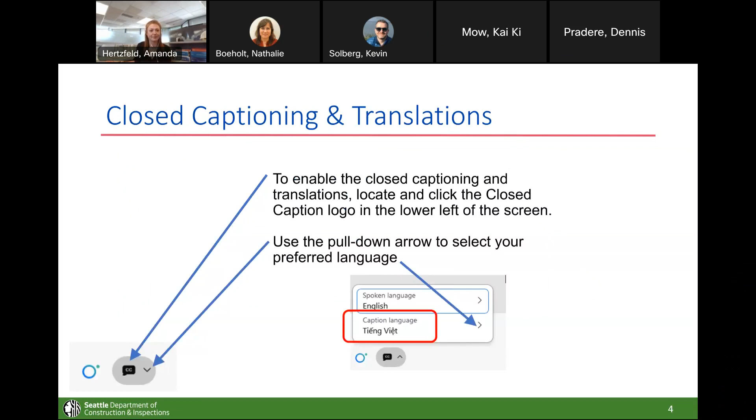So with that, let's go ahead and get going into our meeting. The purpose of today's meeting is to review the draft technical standard for unreinforced masonry retrofits. We'll be providing an opportunity for questions and answers. Some things we'll cover today include the background on URMs in Seattle, why we have this technical standard, where it came from and where we're headed with it. We'll spend most of our meeting reviewing what is in that draft technical standard, and then we'll allow at least a half an hour at the end for questions.

So with that, let's do some introductions. I introduced myself briefly, but my name is Amanda Hertzfeld. I am the URM program manager with SDCI. I was hired on in November, and before that I worked for FEMA, the Federal Emergency Management Agency, doing a lot of earthquake risk reduction activities. So let me toss it over to Kevin.

Hi, can you hear me, Amanda? Yep, great. My name is Kevin Solberg. I'm a structural plans engineer with the city of Seattle, and also have a background doing seismic retrofits in the Seattle area from the consulting side of things. So I'll be discussing the nuts and bolts of the alternate method and the overall technical standard itself. Thanks, Kevin.

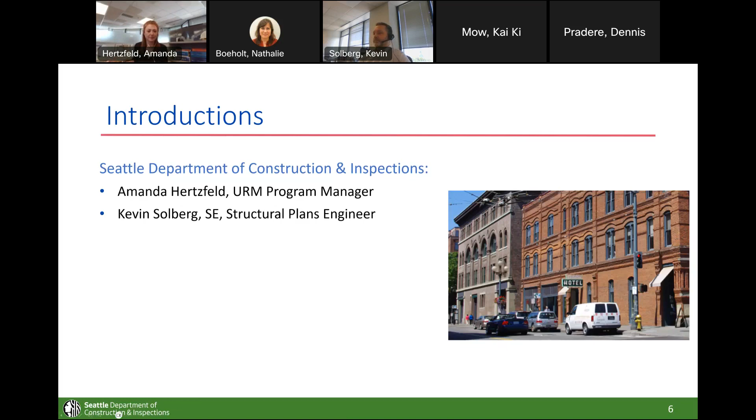So before we get into the weeds on what the technical standard is, I wanted to do a little bit of talking on some background. Why are we doing this? For starters, we have multiple sources for earthquake hazards here in the city of Seattle. Most people think of earthquakes and they think of either the Cascadia subduction zone, the big one, or the Nisqually event back in 2001. We have a lot of other sources that can cause earthquakes in the area. There's a big fault zone under Seattle, the Seattle fault zone.

There's a fault line running up through Everett and Whidbey Island, the South Whidbey Island fault zone. So we live in a very beautiful and very tectonically active area, which is why we are so concerned about URMs, as we know about their vulnerability in an earthquake.

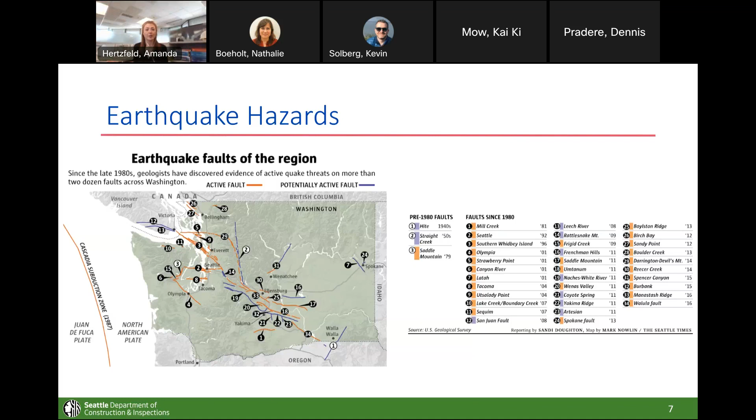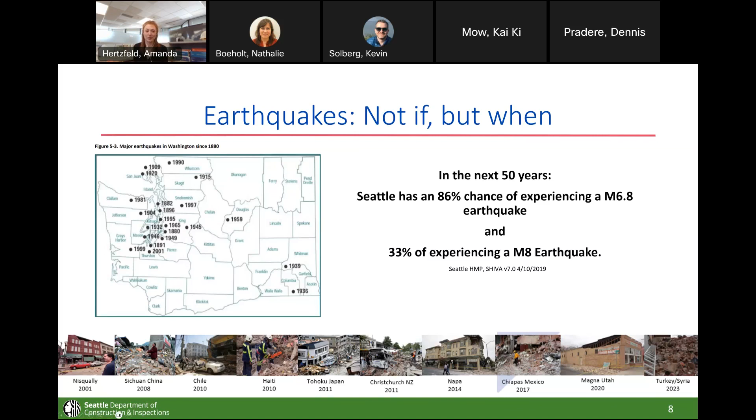And you can see in most of these pictures bricks, because we know that bricks do not perform well in an earthquake. So on your screen now is a picture from the Nisqually earthquake. This happened February 2001, a magnitude 6.8 earthquake, and it injured approximately 400 people and caused upwards of $2 billion in property damage. Over $8 million of that were repair costs to URMs in Seattle alone. So we know that history tells us URMs are vulnerable in an earthquake to both pedestrians and to occupants of these buildings.

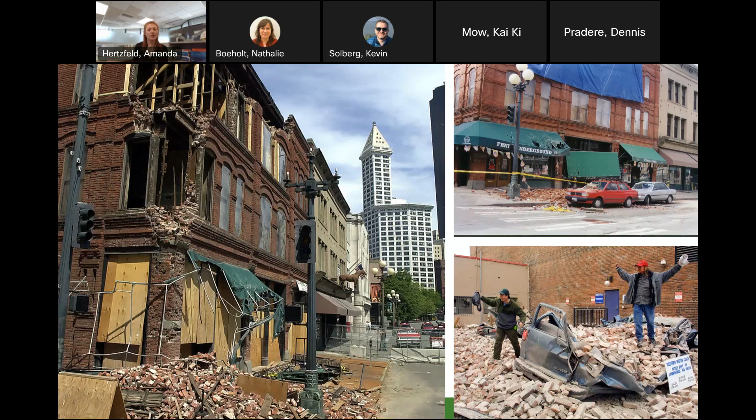So we know how URMs fail. We know that parapets can break away and fall into the street, injuring pedestrians. We also know that walls can collapse, endangering both pedestrians and building occupants.

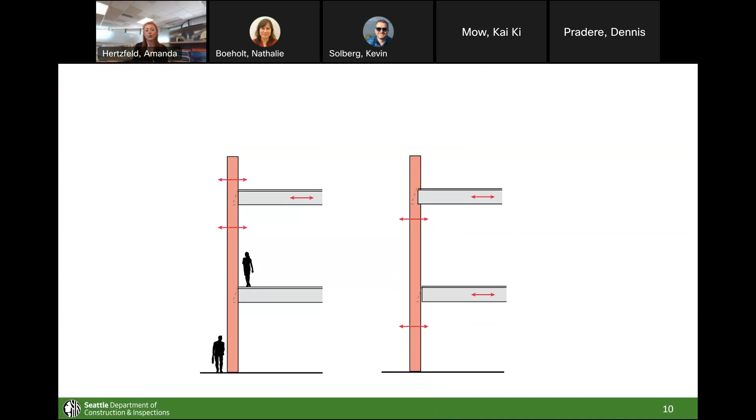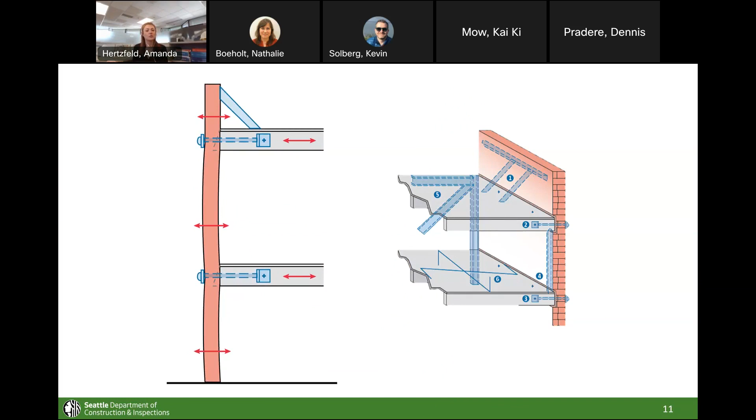So while we know how URMs fail, we also know how to improve the seismic safety of these buildings. SDCI has been working on a technical standard that details an engineering approach to the retrofit of URMs. It defines the seismic hazard as well as requirements for wall anchorage, shear transfer, out of plane wall bracing, as well as parapet and appendage bracing. Kevin will be speaking to the details of these standards in just a few moments.

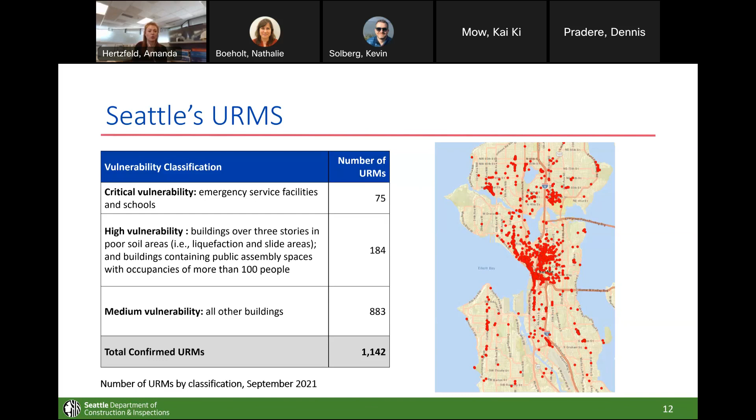Seattle has approximately 1,100 unreinforced masonry buildings. A previous policy committee classified these buildings according to their occupancy type, the number of stories, proximity to areas for liquefaction, and landslide hazards, and that's what these classifications are. By retrofitting our URMs, we can increase the city's seismic resilience, and we can reduce potential deaths, damages, and disruption to our economy and daily life post-earthquake.

I wanted to highlight that in 2012, a team developed a technical standard that was based largely on efforts used previously in California. The technical standard we're speaking to today is an updated version of this, and it's been updated to reflect building code changes, an increase in the understanding of our seismic hazard, as well as soil conditions.

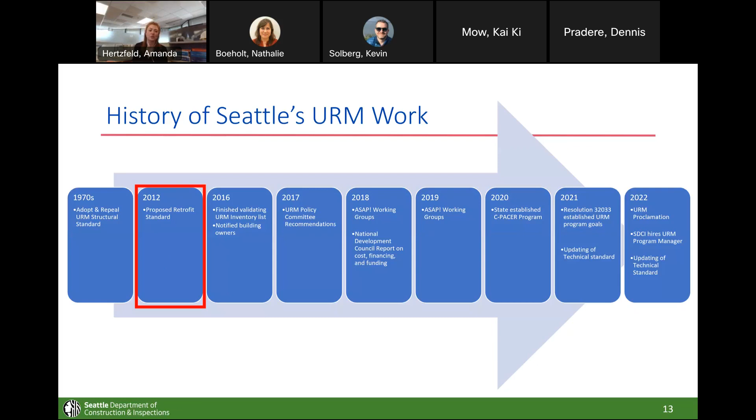The update of the standard was prompted by a resolution passed by City Council in 2021. That resolution, Resolution 32033, directs the city to develop a mandatory URM retrofit program that includes a definition of URMs, as well as the identification of the type of seismic retrofit standard required to bring URMs into compliance. That's what we're going to be focusing on today.

This resolution also asks us to categorize a system for building types for prioritization of retrofits. It establishes a timeline for compliance. It asks us to develop an enforcement strategy, as well as a variety of potential funding opportunities and financial incentives. So we are working on these things in the background, but the first step is to really get this technical component established before we can start getting funding and everything together.

Many of you might be familiar with the URM policy development working groups that I've got going. We have one on communications, on building owner and tenant needs, as well as on funding. If you're interested in joining those, feel free to send me an email. You should have that already, but if not, you'll get that at the end of this presentation.

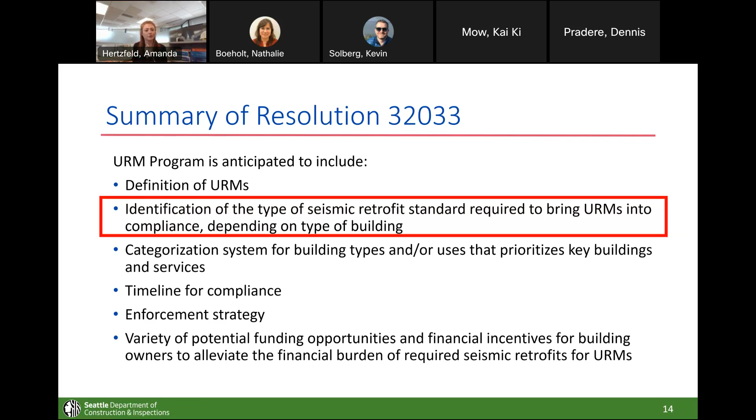While that ordinance does direct us to create that mandatory retrofit program, it has some specific goals that I wanted to cover. It wants us to focus on life safety by reducing the risk of injury from collapse of URMs in the event of an earthquake. So buildings retrofitted to this technical standard should still anticipate damages in an earthquake.

There are more advanced engineering measures that can be taken to further improve performance of a building, and if you're a building owner, you can consult with a licensed structural engineer to explore these options. The intent of this technical standard, like I said, is to reduce the risk of collapse and injury from collapse in the event of an earthquake.

The ordinance itself, once it goes live, will have a few other goals. One is to preserve Seattle's historic and culturally significant landmarks and structures, contributing to neighborhood character. So we're not trying to demolish buildings with this, we're just trying to improve life safety. We're also trying to improve the city's resilience to earthquake events by reducing downtime, and we want to minimize the impact of a retrofit program on vulnerable populations to the extent financially feasible.

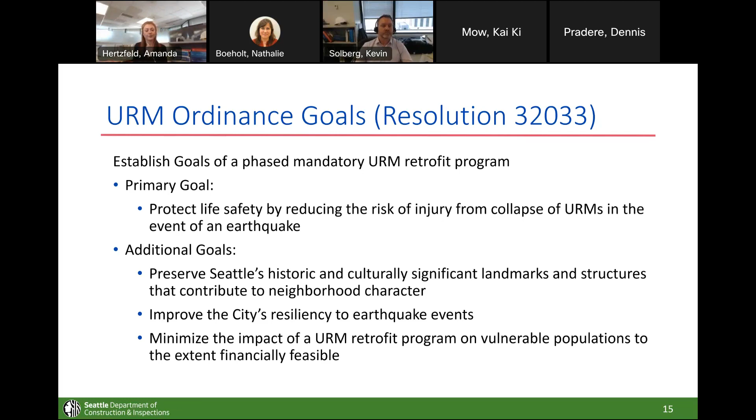So with this, I'm going to pass it over to Kevin to walk through the technical standard.

Thank you, Amanda. Again, I'm Kevin Solberg, and let's get started talking about what we've been up to in the past year. The URM Technical Standard Task Group was formed back in July of 2022 to review the technical standard that had been developed about 10 years earlier, and to do some updates to it based on current codes and better understanding of the seismology of the area, and really just to improve the overall clarity of the document as well.

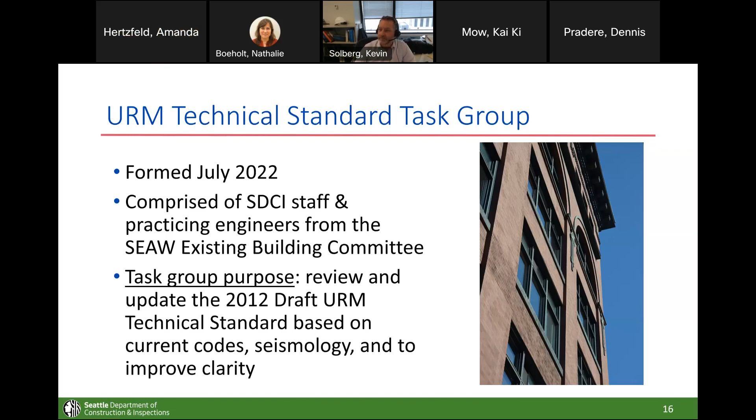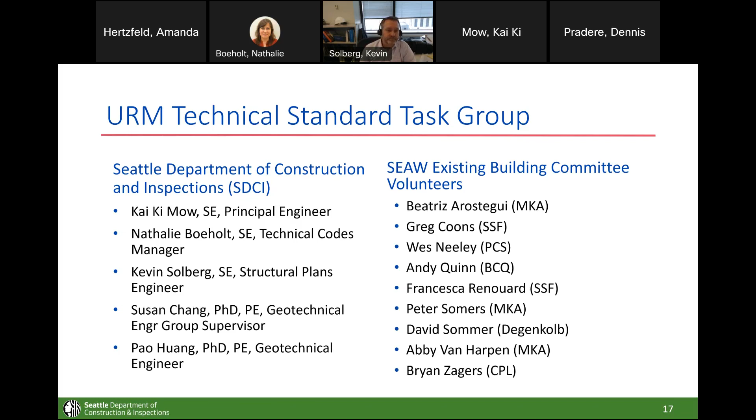Similarly, as we move across with these columns, we have a Cascadia subduction zone event represented here—that's a magnitude 8 or 9 earthquake occurring out on the west coast of Washington State. And then finally, the maximum considered earthquake that really impacts Seattle is a Seattle fault type event. That's a very shallow, very strong shaking earthquake that would have a lot of impact to the building stock in Seattle.

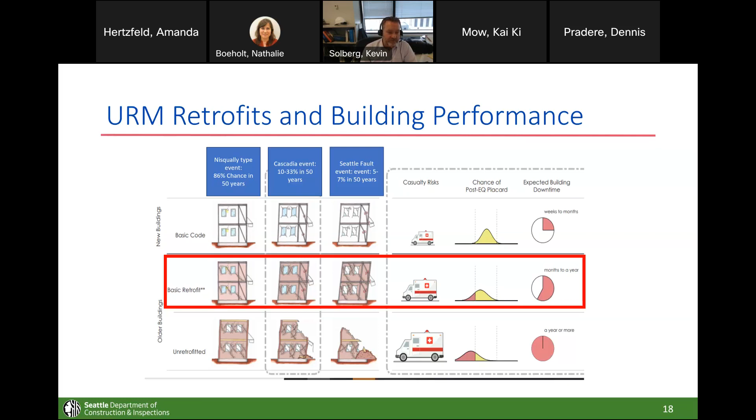The second is definitions, which includes the definition of what a URM building is. There's specific language there about what this standard entails and what scope of building it includes—those are URM bearing wall buildings, essentially buildings without reinforcement in the walls.

Section 3 then goes on to define some of the retrofit method options that are available. There are ways to essentially exempt your building from the requirements of this method, and we'll talk about what that is. Then there are 2 retrofit options of varying level of complexity and cost that a building may or may not qualify for, and we'll talk about what those qualification requirements are.

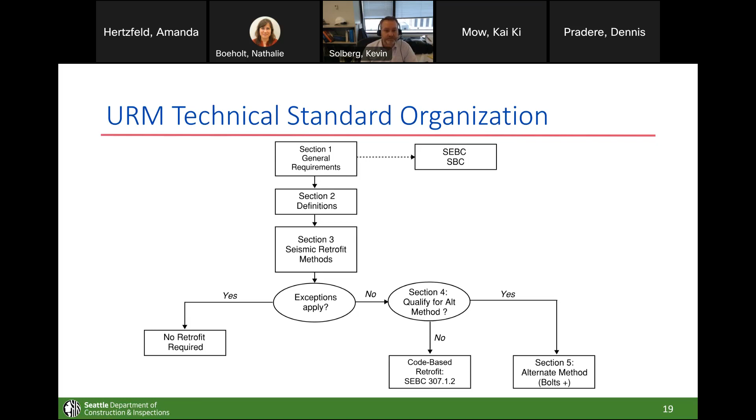So let's start with the exceptions. There have been a lot of retrofits to buildings for many, many years in Seattle—there's a lot of retrofitted URM buildings that exist today. Seattle has what's called a substantial alteration requirement for buildings that go through substantial renovations, and a lot of those buildings will qualify to be exempt from the requirements of this method.

So first off, we have a few categories represented here. We have substantial alterations that were built or retrofitted to the 2006 Seattle Building Code or newer. Buildings that meet that criteria really don't require much of any documentation—you essentially show us the permit number and what it was retrofitted to, and that's about it.

Now, substantial alterations also could qualify if they were built under the 1994 Seattle Building Code up until the 2003 Building Code as well. In this case, they could be exempt, but they also need some backup documentation, essentially to show that the buildings were retrofitted as intended. So a structural engineer would be needed to review the drawings and make a statement indicating that the design essentially met the code of the day.

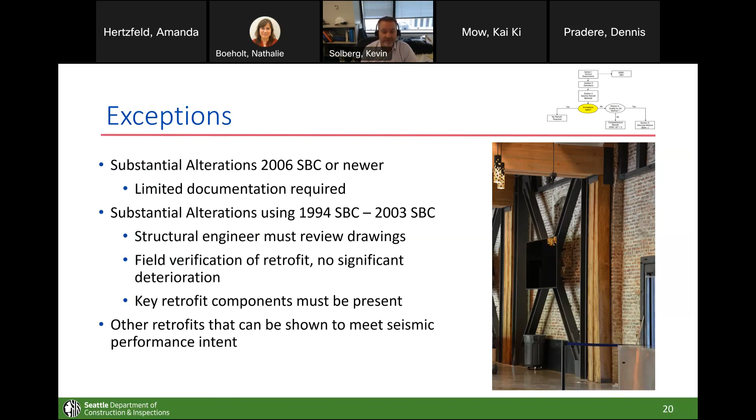Finally—well, I should go back to that last slide. There's a third pathway that's a bit of a catch-all, but there's a lot of buildings that may not quite meet the specific substantial alteration requirements from the '94 SBC and beyond. That still may be able to qualify, and we provide a pathway for doing so to be exempted from this approach, if it can be basically demonstrated that what was done to the building meets the overall performance intent in terms of life safety and prevention of collapse that we talked about previously.

So let's move forward and talk about, now that we've covered what exceptions could potentially apply, what would be required to qualify for the alternate method.

Let's talk big picture. The alternate method is kind of the simplified version where we're only targeting very specific components of the building, versus the code-based retrofit, which is the more comprehensive retrofit of the building itself.

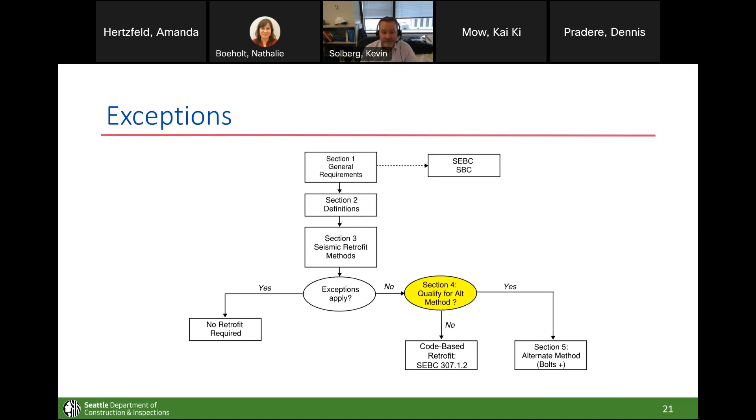Qualification for the alternate method consists of several items that we would be looking for in the building. The overall goal of this qualification is to ensure that the building is somewhat regular in its shape, since regular buildings tend to perform better in earthquakes, and that the lateral system of the building has some basic level of lateral resistance.

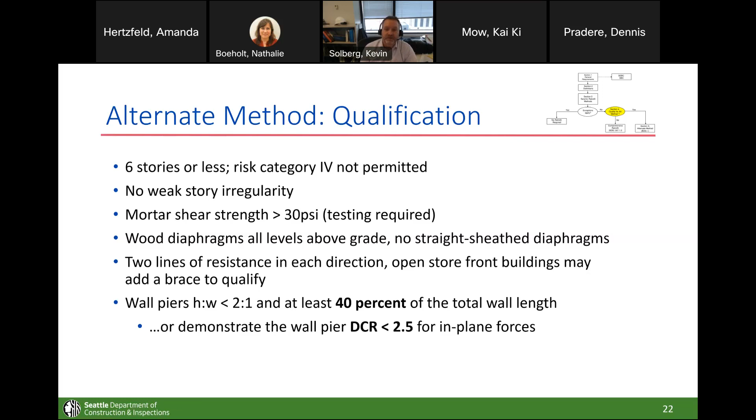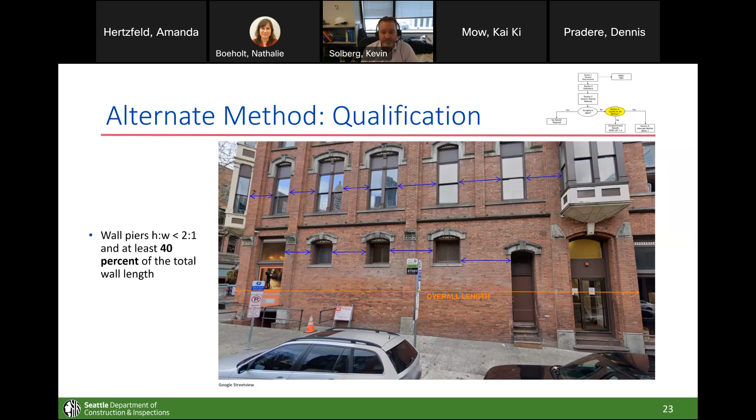Here's an example of a building that potentially would meet the 40% ratio. You can see here that all the walls stack quite well, and the size of the window openings relative to the walls is relatively small, probably meeting that 40% requirement. Most of these piers also appear to meet the 2-to-1 requirement, so this might be an example of a building qualifying for the alternate method.

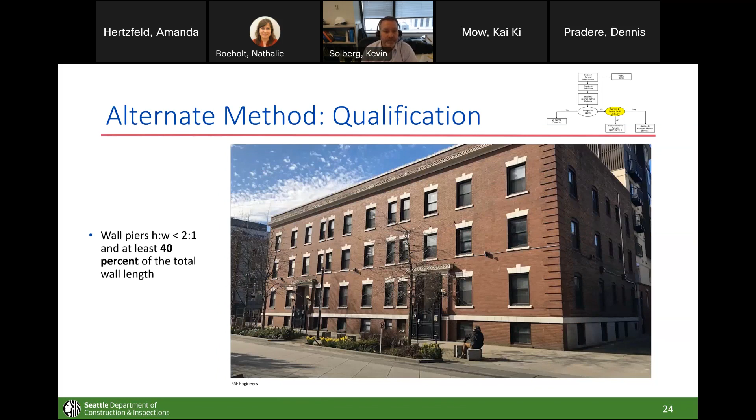In addition to the 40% wall pier length, there are other requirements, such as buildings must be 6 stories or less to qualify for the method, and they must not contain risk category 4 type functions.

Risk category 4 is a term we use to categorize buildings depending on their risk. That includes emergency shelters, fire stations, hospitals, and buildings containing hazardous substances — places with a strong public need for use after an earthquake wouldn't qualify for this alternate method, since this is the bare bones basic retrofit method available.

In addition, the building would need to demonstrate that it has 2 lines of resistance from lateral forces in each direction. In this example, the building has a nice solid brick wall running along its full length, so that certainly would qualify.

However, what we call an open storefront building, with a large number of windows relative to the area of wall on the front of the building, may not necessarily meet the 40% pier ratio. But there is a pathway to qualify by adding a specific brace on that side of the building to meet the two-line resistance requirement.

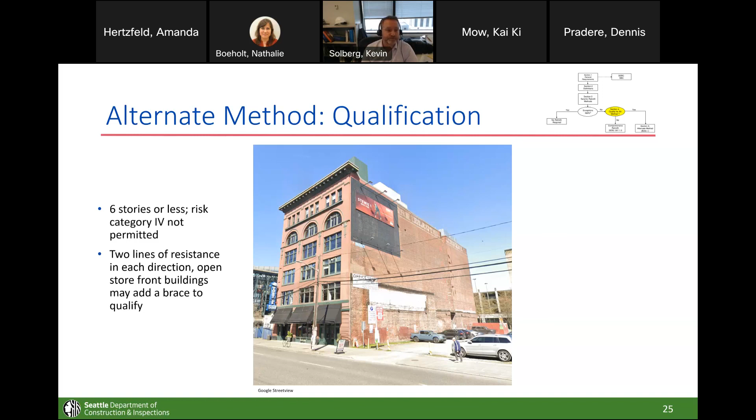However, there are some exceptions to that. If the span between walls of these floors is within a certain limit, you could potentially qualify that way as well.

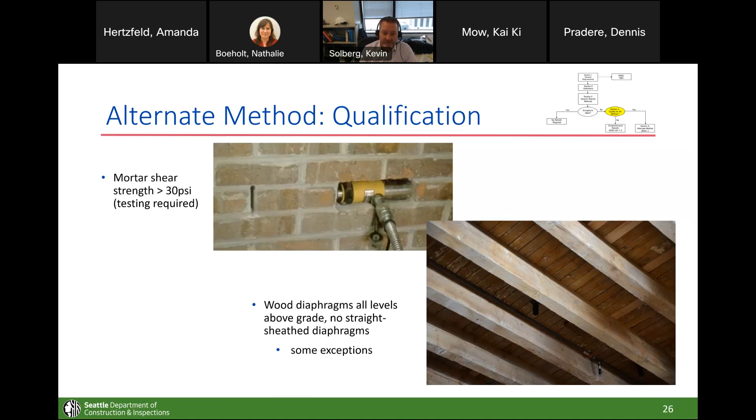So those are the overall qualification criteria needed to use this alternate method. So what is the alternate method? Some of you may have heard the term bolts plus — a term commonly used in California to describe a lot of the unreinforced masonry retrofit work that has occurred in that state. The method developed here is quite similar, so let's go into the details of what it actually is.

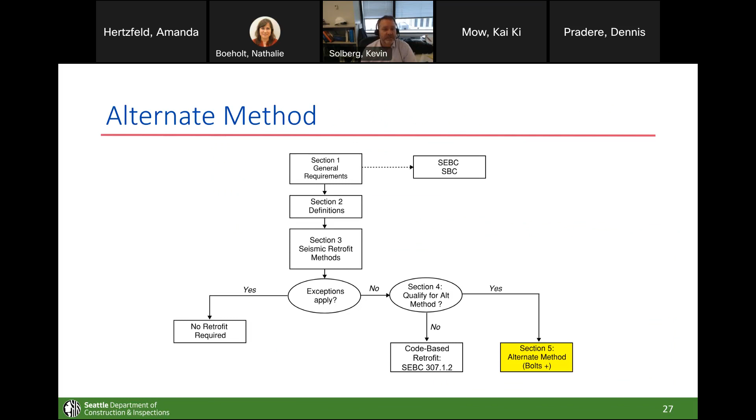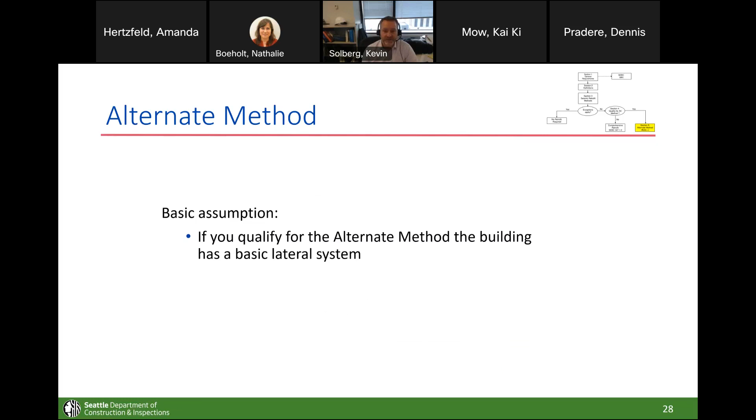Let's start with the basic assumption, as established in the qualification criteria: the building has a very basic lateral system, so we feel it has the ability to more or less stand up on its own, provided that we address some of the common deficiencies in these older unreinforced masonry buildings.

So this method was developed overall to minimize the cost of the design and construction, while also addressing the key life safety issues associated with these types of buildings. What's different from the version developed in 2012 is that we've now taken the specifics of this method and put it into this document itself.

So the method is fully encapsulated within the document. Part of the reason we did that is we wanted it to be very clear exactly what work needed to be done, what calculations needed to be conducted in order to determine bolt spacing and aspect ratios, and all the things we'll talk about associated with this method.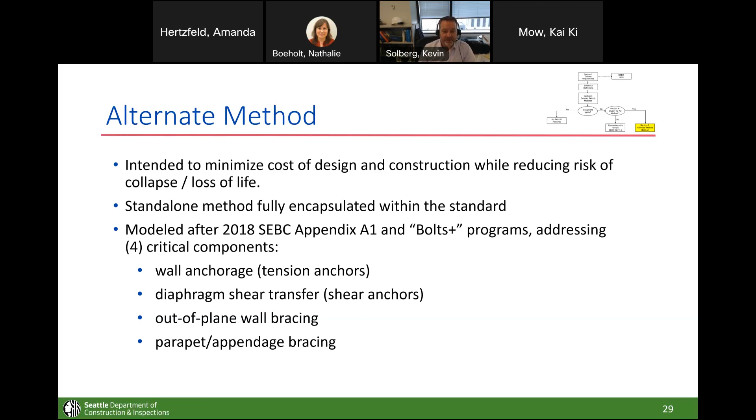There are four key components that this method addresses: wall anchorage, diaphragm shear transfer, out-of-plane wall bracing, and parapet bracing. If you go to the next slide, we'll talk about each one of those.

So again, going back to the slide Amanda had shown previously, this is the typical failure mechanism that we often see in unreinforced masonry buildings. You can see breaking away of the parapet on the left, and then you can see the floors giving way from the wall itself, which leads to overall collapse of the building.

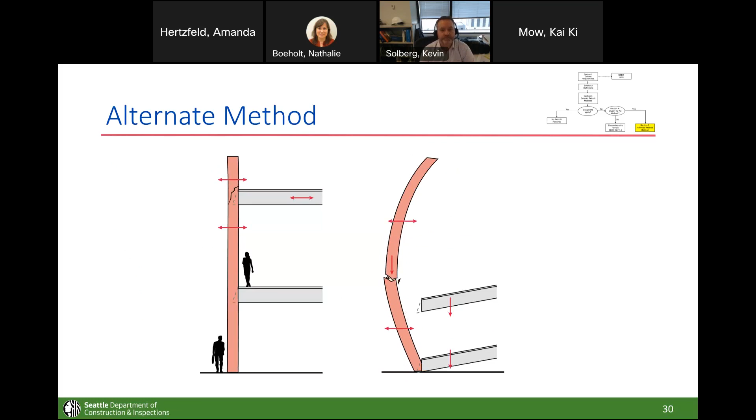Now, how do we address that? Well, first off, with the parapets, we install parapet bracing. There are a few example photographs of that here. This generally consists of steel angles or some other means to support the parapet towards the top of it, and then tie that back into the floor in some way.

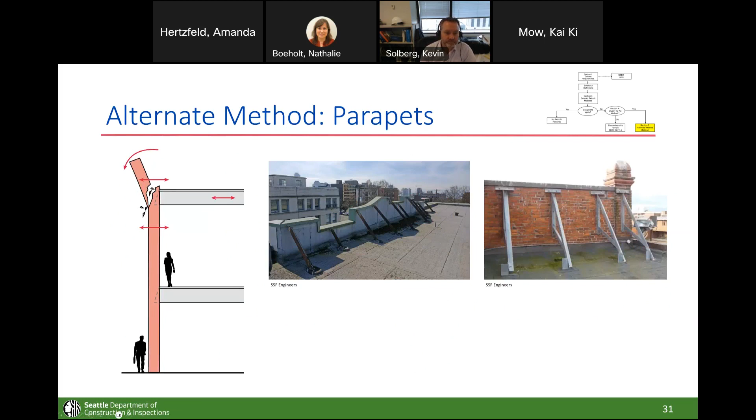The out-of-plane bracing is a requirement to ensure that tall, slender walls don't fail out of plane, which you can kind of see happening here towards the end of this animation. If the support of the walls is too far away, such that you end up with a very slender wall, that could lead to out-of-plane failure. So we require that the walls meet certain height to thickness ratios. If those ratios are met, no further action is necessary.

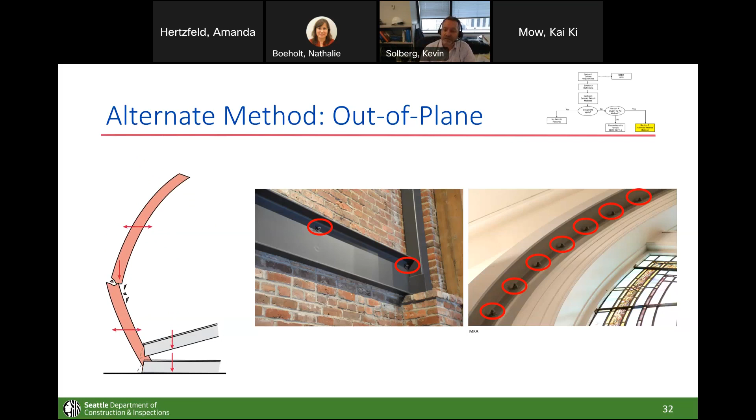A lot of the walls out there will meet that requirement, but there's a sampling that wouldn't. I want to show a few photographs of walls that didn't meet that height to thickness ratio, in which case engineers added bracing mid-height of the wall to address that. You can see that here on the left with the angles, and on the right with this curved member next to this stained glass window.

And then finally, we have the anchorage of the walls to the floors themselves. This is probably the most critical piece of all this, and it ensures that the walls don't break away from the floors and lead to collapse of the building. This is addressed either through bolted anchors, historically called rosettes, that tie the floor into the wall, or oftentimes what's used now is angled rods that go into the wall and are essentially glued with epoxy in place.

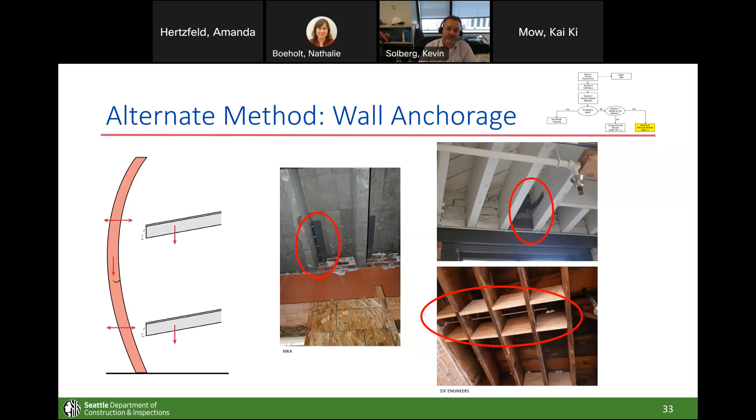So those are the main components of what goes into the alternate method. It's these four components: the wall anchorage—well, really kind of three components, because two of them work as one: the wall anchorage, and there's also a requirement for making sure the floors work in shear as attached to the wall. But you can see the basic components here as it's addressed and what a system would look like.

The animation on the left shows what the overall retrofit would result in terms of overall building performance. I would like to note that this alternate method is considered a very, very basic retrofit, which only addresses the absolutely most critical life safety components of the building.

And if there are building owners listening to this call, I want to make sure it's clear that using this alternate method does not relieve you from the typical requirements associated with a substantial alteration. A substantial alteration and the seismic requirements that go along with that are more rigorous than this method, and could be triggered if there's other rehabilitation work done to the building in the future. So I'll make sure that's clear.

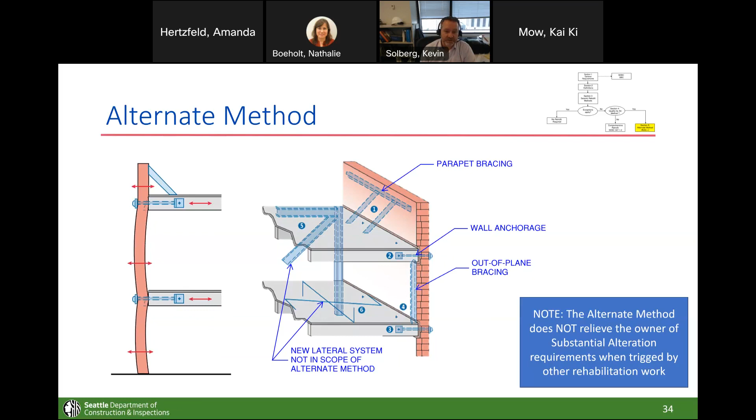And I think that's a good segue to our next topic, which is what happens if you don't qualify for the alternate method. So if you don't qualify, that puts you basically into what we're calling the code-based retrofit.

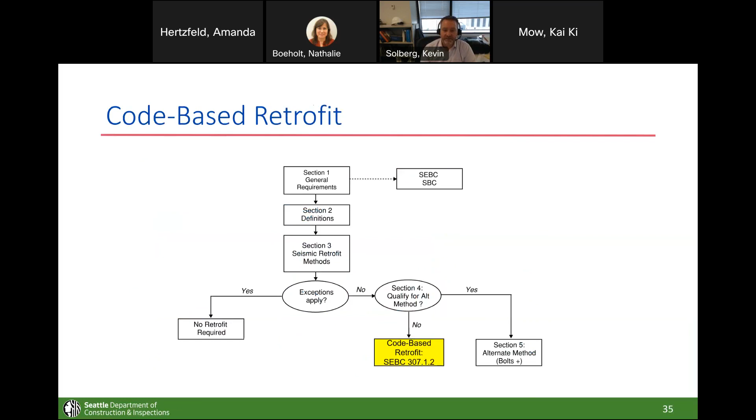So the code-based retrofit is essentially the seismic retrofit component of what would typically be required for substantial alteration. I want to stress this is just the structural piece of that. In addition to what we covered with the alternate method, it takes that next step in that if you've ended up here, there's concern that the overall lateral system of the building is not sufficient.

So that's a big piece of what this method would typically address. There are some breaks given in this case. For example, you don't have to use the seismic forces for that of a new building. You typically use around 75% of what those forces would be. So there's a break there.

There are options for using some retrofit standard documents that exist and are commonly used in the United States and around the world that provide these checklists, highlighting big picture things that an engineer would go through and look for in the building and determine if that is compliant or non-compliant. For example, the redundancy check was compliant, but the shear stress check was not. That would be something we'd probably commonly see, as it wouldn't be passing these shear stress checks, which would then result in added lateral systems to the building. Other things could be strengthening of the floor diaphragms.

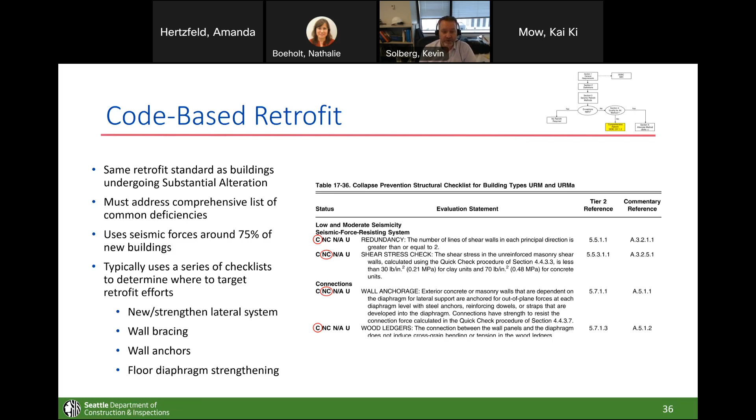Let's go to the next slide and look at a few examples. So here's an example of a building that went through a substantial alteration. Because this is associated with this method, we'll just focus on the structural components, which would be the only part required as part of this technical standard.

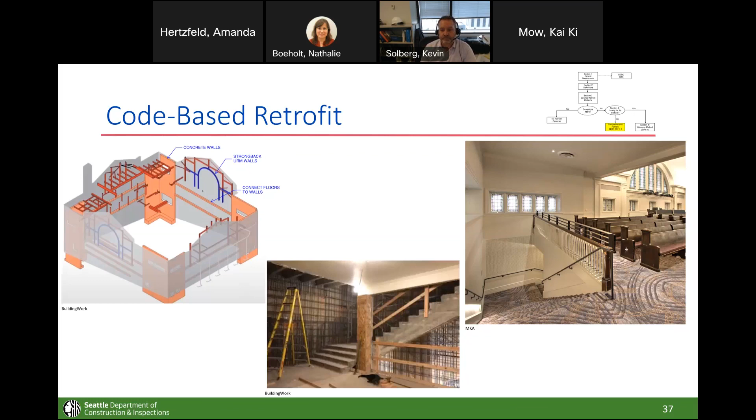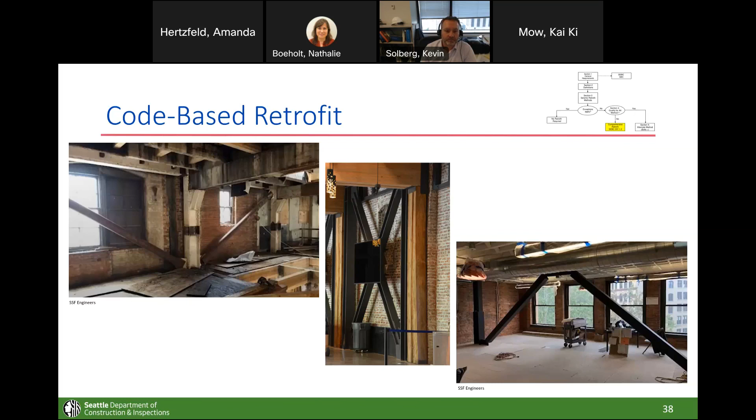So that's essentially the technical standard. We went over the different retrofit methods that would apply here, what exceptions could potentially get you out of requiring further retrofit work. We talked about what would qualify in terms of building attributes to use the alternate method, and then we talked a little bit about if you didn't qualify, what would be part of the overall retrofit using a code-based approach. So with that, I'll pass it back to Amanda.

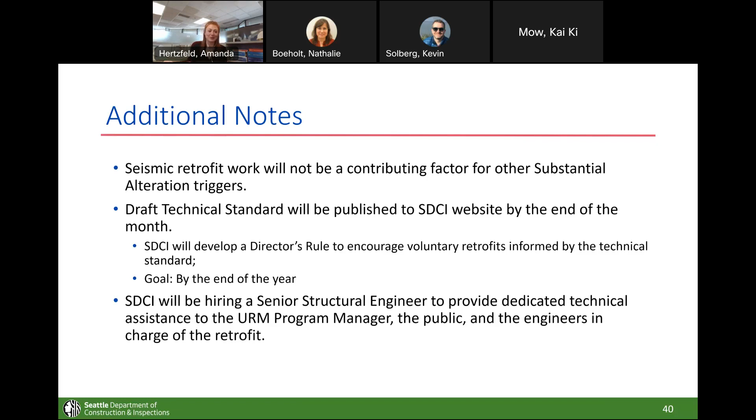And I also wanted to ask the big underlying question here: you've been talking everything voluntary. When is this going to be required? Right now we're thinking that the soonest we could have a mandatory ordinance in place would be summer 2025. That's due to us really trying to be intentional, trying to identify funding resources, as well as resources for building owners and tenants to help them navigate the retrofit process. This is, like I said at the beginning, a really complicated process, and there's a lot of steps that need to happen before we can get an ordinance in place.

So again, this technical standard is set to be voluntary until we have that mandatory ordinance passed in mid-2025.

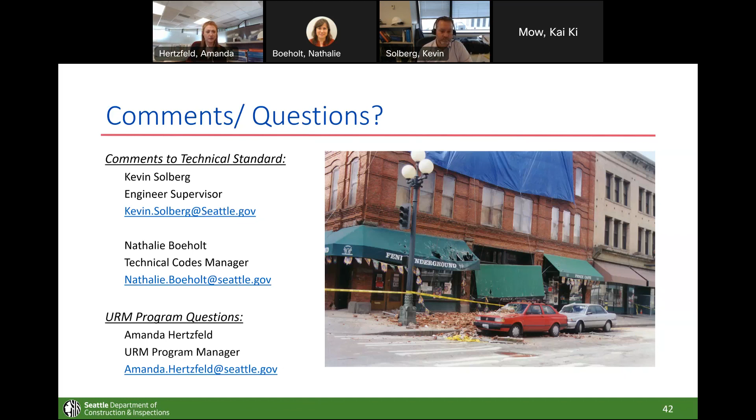There's another question asking if we can go back to the slide with the anticipated timeline. I can certainly do that. Let's see, another question: can applications for review of retrofits via the alternate method be submitted after the technical standard is published?

Kevin, do you want to answer that? Sorry, could you repeat that one more time? Can applications for review of retrofits via the alternate method be submitted after the technical standard is published?

Yes. This gets a little bit into the nuance of how, from a policy standpoint, we're going to be dealing with buildings that come in using the standard. But certainly, yes, the way it would currently work is it would fall under the voluntary seismic upgrade under Chapter 3 of the Seattle Existing Building Code. So it's voluntary work, just like any other voluntary seismic work you'd be able to do currently. Hopefully that answers the question. If not, maybe you can clarify.

Thanks, Kevin. The last question, again, this one's for you, Kevin. Is there any guide to calculate the use of epoxy on existing buildings?

Yeah, so for the alternate method, we essentially took some tables from Appendix A1 of the Seattle Existing Building Code, which has some information about capacities of different types of new building components, like anchors installed in a URM wall. In those tables, there are also footnotes that allow you to use other methods, which the epoxy would fall under. There's proprietary epoxy out there documented with ICC reports, which is a standard used to confirm they can be used in specific ways. Within those ICC reports, there's information about capacities that can be used if the epoxy anchors are installed per the document.